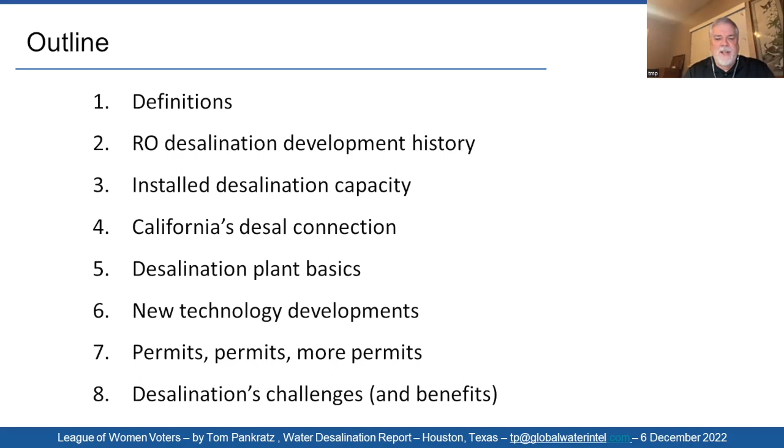Now, desalination - let's go to the next slide. Desalination means different things to different people, but basically it's the removal of dissolved solids, primarily salts, from water. It can be seawater or brackish water. In fact, for making semiconductors, they take drinking water and run it through a desalination system to remove anything remaining in it. So desalination is a pretty broad subject.

Now, I've already heard someone mention desalinization. While that's acceptable, it's kind of an archaic way of pronouncing it - primarily a European pronunciation that's pretty much fallen by the wayside. So I don't usually correct people, but if you want to sound like a true desalter, as we call ourselves, we pronounce it desalination.

The salts or dissolved solids in water are usually measured in milligrams per liter or parts per million, ppm. They're basically interchangeable - there are some subtle differences, but it's the amount of salt in water by weight. To put things in perspective, drinking water that's palatable, as provided by most municipalities, usually has less than 500 parts per million of salt.

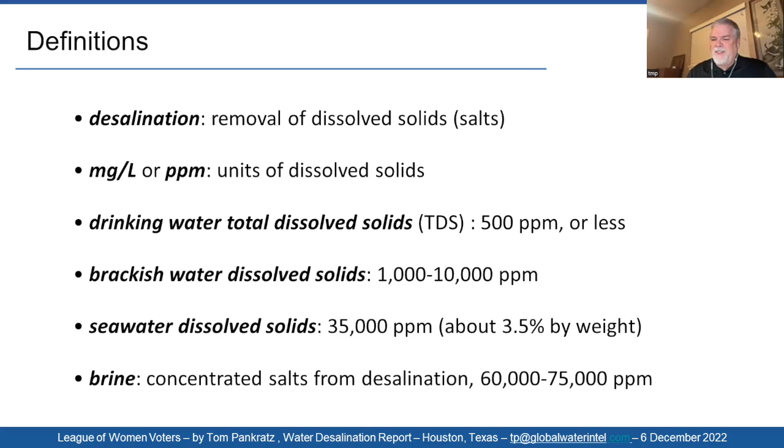goes through the reverse osmosis system we'll be talking about, just like seawater. But today's presentation is going to primarily focus on seawater, which has a dissolved solids concentration of 35,000 parts per million - that's about 3.5% by weight. When you're desalting water, you divide it into two streams: one essentially fresh water with a TDS of less than 500 parts per million, and the other with concentrated salts, including the salts that were in the water initially and the salts removed from the drinking water. So you're almost doubling the concentration of salt in the water. Next slide.

Now, the whole discussion today is going to focus on reverse osmosis, which is a membrane process, and it's the primary way that seawater is desalted around the world. For many years, for the last 70 years, there were a lot of evaporative systems which boiled water and then condensed the vapor and used that as drinking water. But the cost and the energy required has gotten prohibitive, so most of the world's desalination capacity has shifted to the membrane process.

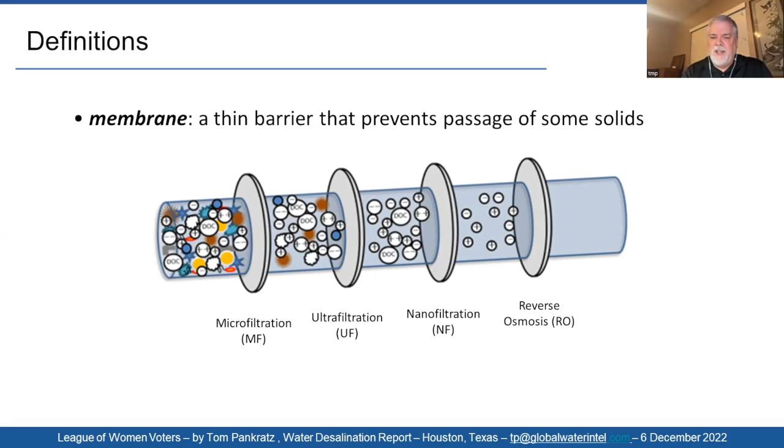It removes some of the bad actors, and if you've got a fairly low salinity in the groundwater, or maybe just some organics that you want to remove, it may be a less expensive alternative. Now, ultrafiltration and microfiltration are two filtration processes that remove bacteria, sand, silt, and other solids in the water. So with reverse osmosis, if you're trying to get out the individual salt molecules, and it has all of this other stuff in the water, sand, silt, algae, bacteria, pathogens and so on, it could really plug up the RO membrane. So it's important that you get those out first. You wouldn't have these four membranes in series, but you might have either a microfiltration or ultrafiltration preceding a nanofiltration or an RO membrane.

So it'll continue to do that until it reaches... can you go back a slide? Yeah, right, sorry about that. Okay, go back one more too here. Yeah, sorry, okay, that's okay.

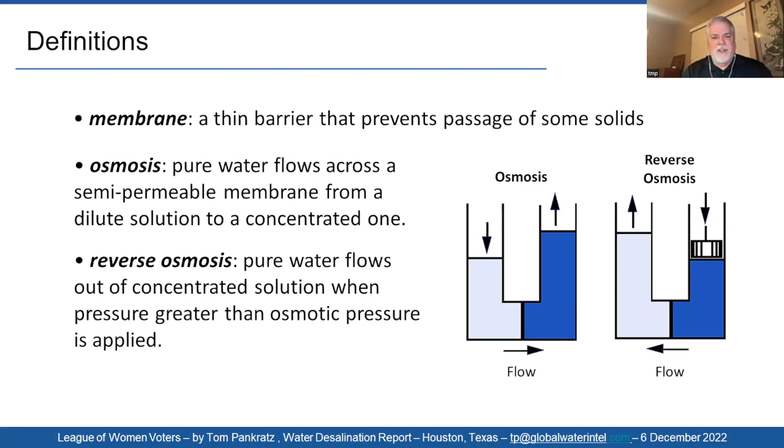Okay, so a little bit about the membrane itself. It was developed at UCLA, although the process of osmosis was understood and invented back 200 years ago. There was never a practical way of applying it to desalt water until 1959, when two university researchers at UCLA developed the cellulose acetate membrane, and they patented it in 1960.

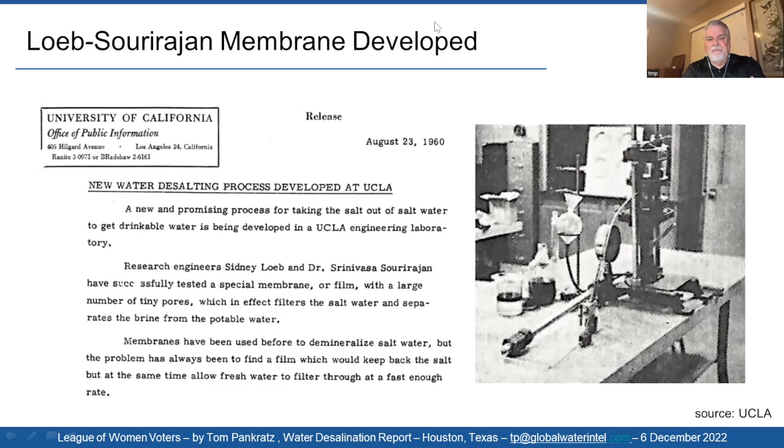In fact, just in the last year, Coalinga is now reconsidering. It's grown quite a bit naturally, and with the drought affecting the Colorado River and other water supplies, they're considering going back to RO.

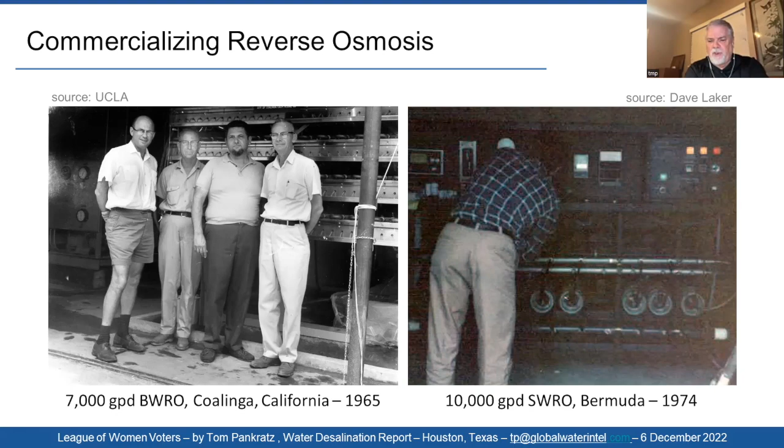The slide on the right shows the first seawater RO unit that was installed in Bermuda in 1974.

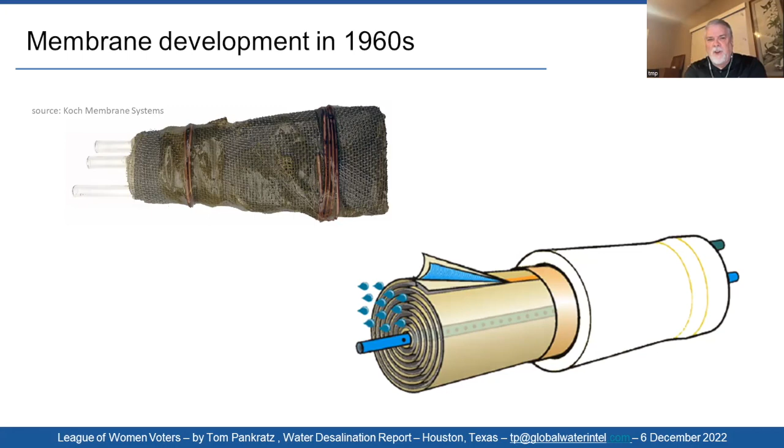This shows the modern one. The company that made that upper one was Roga, as I said, and they were bought by Fluid Systems and then Koch Membranes. This first membrane was in a little glass case right outside David Koch's office.

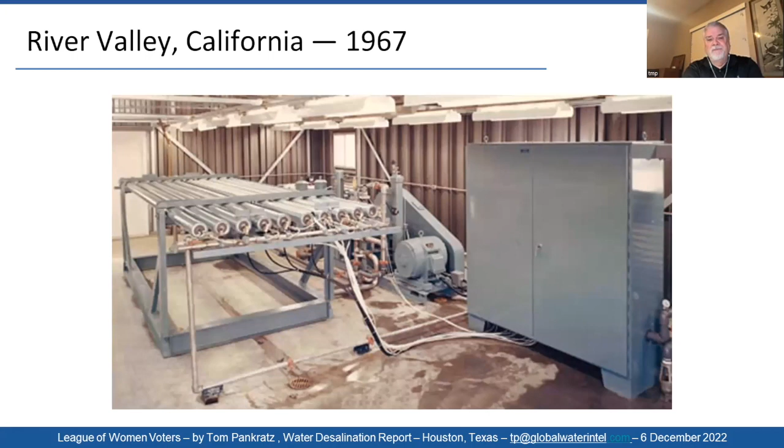So just a little bit of history, but we see here that if we look at 1967, when that was the biggest in the world, we've come a long way. About 2000, the industry really started to take off because reverse osmosis was proving more effective. We got a lot of experience here in the 80s and 90s, but still there were a lot of evaporators going in, primarily in the Middle East. But around 2000, it really started to take off.

And since then, almost all of the capacity that's been installed around the world has been in seawater RO. I've got the units up there to give you an idea: 26 billion gallons per day of water is desalted. Now that's desalted both seawater and brackish water, but it's the cumulative capacity that's been installed since 1965.

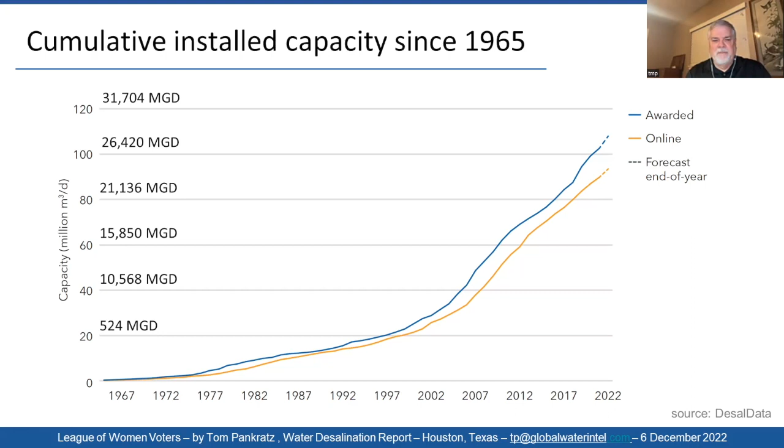Just a quick look at recently, in the past few years, we've installed more new capacity, with 2019 being the record. We've passed that up, or are about to pass it up next year, with getting 7 million cubic meters a day globally. So it's growing quite rapidly.

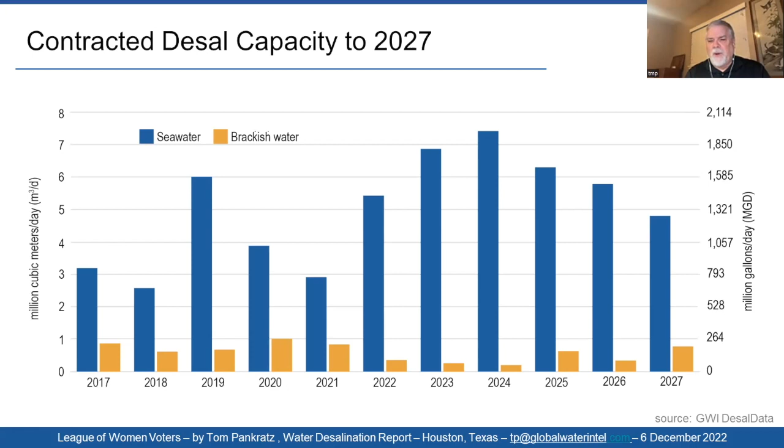But one of the big issues in California has been the intake. How do you remove the water without sucking in marine life and killing it? The Coastal Commission, who is the governing body in California, is extremely active in protecting the California coast. And the California Ocean Plan has a very rigorous intake requirement, and it's prevented most of the recently proposed plants from moving forward and slowed down quite a few of them.

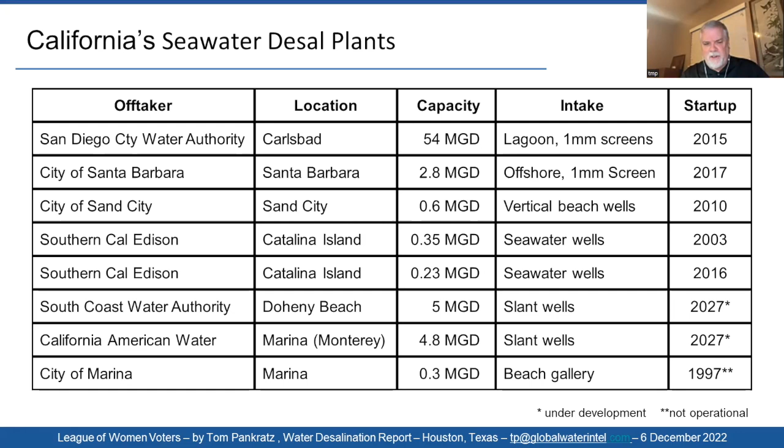But this gives you, these are the plants right now, the only seawater plants in California. There have been quite a few more proposed. There are some other ones that are in the very early stages, but I wanted to start by just providing that baseline. Okay, next slide.

And the California connection—one of the reasons I spend a lot of time in California is because a lot of the companies and consulting engineers that I do advisory work for, and have been involved in a number of projects—one in West Basin, one in Santa Cruz, one in Marin, as they were trying to develop it. So I've been out for those projects and others.

But there are a number of desal companies that are headquartered in California. And that's really where, first of all, we know that's where it lists the desal innovations at the top. That's where the membrane was invented. The spiral wound element was developed, along with a number of other firsts.

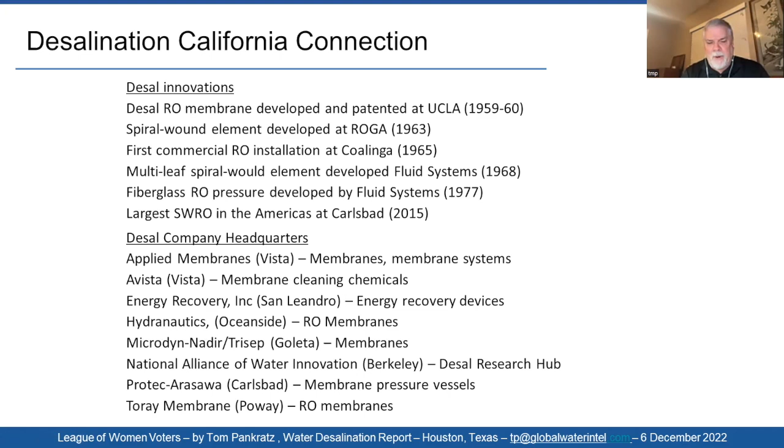And then some of these companies are world-class companies. In fact, this Energy Recovery Incorporated—they probably have 80% or more of the seawater desal market with the device that they invented to recover energy from the system and reuse it. Some of the biggest, two of the four biggest membrane companies are headquartered in California.

Next slide. So I'm going to start here and just kind of walk you through a desal plant, show you the basics. This first slide is the most basic diagram that I could come up with, showing the elements of a desal plant. And we see, first of all, the seawater intake, which is a screening mechanism. We'll look at some of those in a little while.

Then the water has to be pre-treated. This is where you get out the solids, the sand and the silt and so on, so that the membrane can do its job. Then once you go through the pre-treatment system, you pump it up to something in excess of the osmotic pressure of the water. In the case of a brackish water system, you might pump it to 200 to 400 PSI. In the case of a seawater RO system, it would be 800 to 1000 PSI.

The water that goes through the membrane is considered desalted. Then a little bit of some minerals are added back, some calcium and others, just so it tastes better. And then it becomes product water. Meanwhile, the concentrate—which is all the brine, remember the 60,000 to 75,000 milligram per liter salt—is discharged back to the sea.

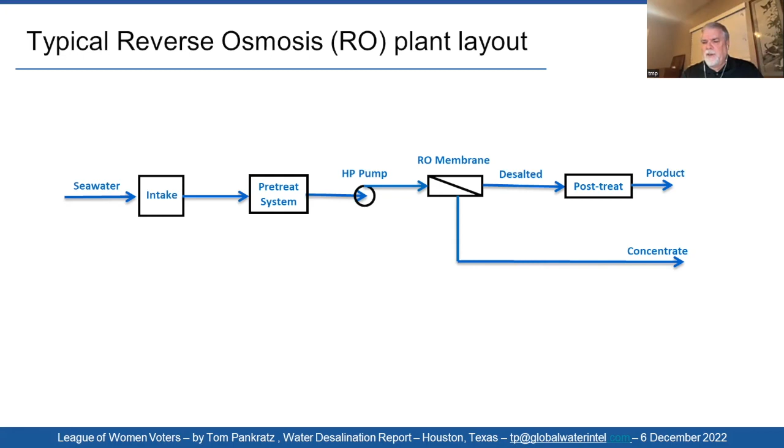Now, the next slide shows the typical variation that you have for a seawater RO plant. As I just said, for a brackish water plant, you're only operating at 200, at the most 400, but probably 200 to 300 PSI. For a seawater plant, though, if you're operating at 800 PSI, once you pump it through the membrane, the desalted water comes out at just 10 or 20 PSI, pretty low pressure.

And all that pressure is stored in the concentrate. So what they've done to make seawater RO more energy efficient is they take that high pressure, run it through essentially a little turbine, and use that energy to boost the high pressure pump, so they're able to recover well over 50% of the energy. This is a way that we keep the energy cost down to a much more viable range. The concentrate is then discharged.

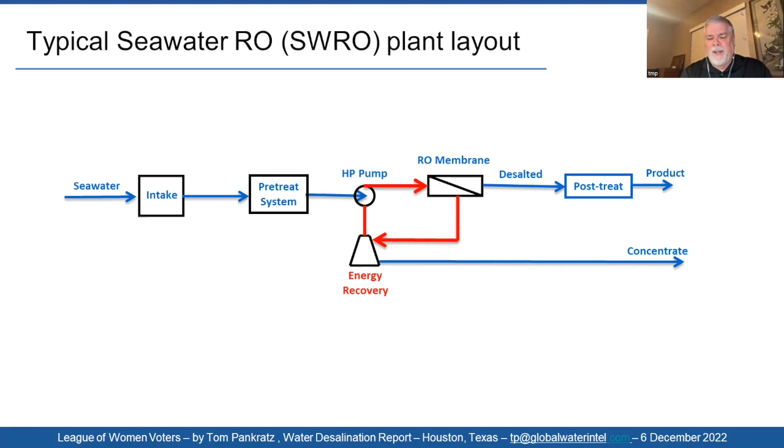So this is what the elements in this particular schematic are, what you'd see in a seawater RO plant. Now, the next slide shows another change that's also made for most seawater plants. In fact, the ones in Carlsbad and Santa Barbara certainly have this.

They take the solids out in the pre-treatment system. You might remember from that first slide where I showed all that stuff removed by the ultrafiltration or microfiltration membranes. Well, you've got to get rid of that, and that goes to another residuals treatment system and then is trucked away as sludge. Meanwhile, the water that's recovered from that goes back into the system. So it's all an attempt to keep this thing from wasting any water.

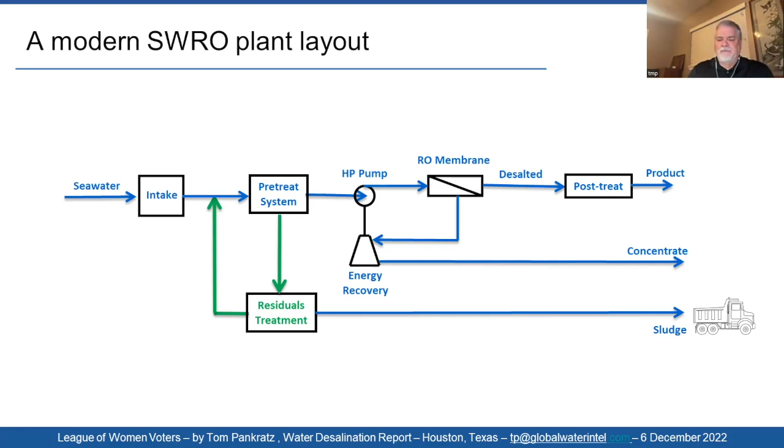And once you've treated it and pumped it from the sea, you want to turn as much of that into drinking water as possible. Next slide. To show you the water balance here, this is what you can expect out of a seawater RO plant. For every 100 gallons you put in, you expect to get about 45 gallons of product water and 55 gallons of brine. The sludge is just solid, so it really doesn't factor into that equation.

This is what we call the recovery. So the system - some people say an RO plant is inefficient, it only recovers half of the water. Well, that's true, but the fact is that once you start concentrating that brine up as high as you do, over 60 or 75,000 milligrams per liter, it gets very expensive to recover any additional water. So that's a concession that has to be made, and we'll talk more about that later.

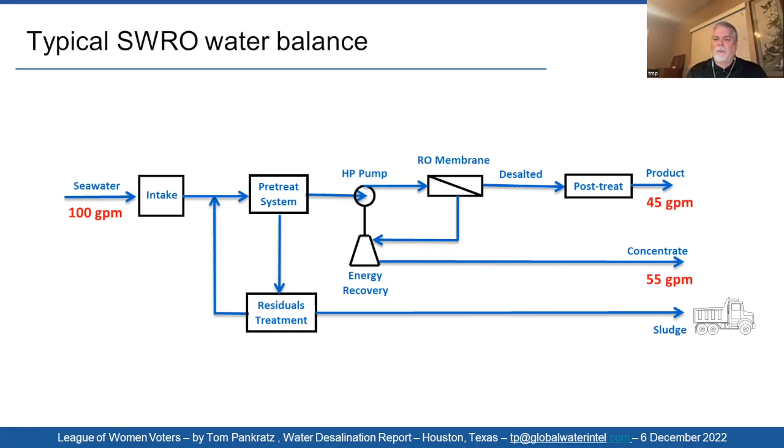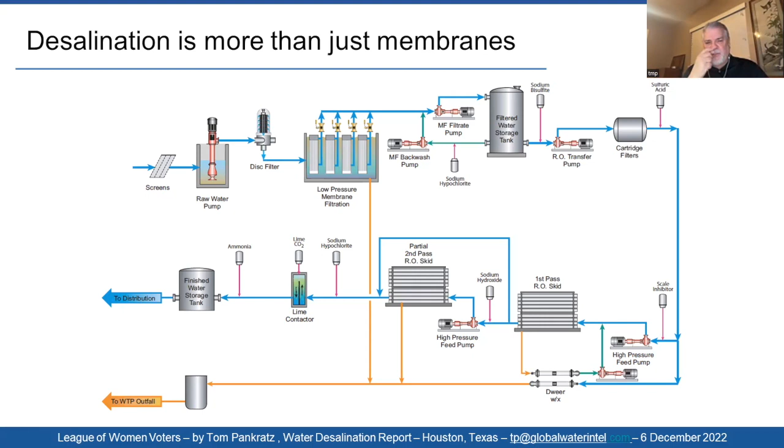Next slide. I've shown you just a block diagram in the previous slides. This shows what an actual functioning plant would look like. Starting in the upper left, the water flows from left to right, then down, and then through the system. So we're going to quickly break this down into its component parts.

Next slide, and the first being the intake. This shows what a typical seawater intake looks like in most of the world. You have these intake heads, which have screens on them, ranging from 1 millimeter in some plants, especially the California plants, to as much as 2 inches in some other plants.

The water is then pumped to shore where it's treated in the desal plant we see on the shore. The drinking water goes out one end and the concentrate goes back out to the sea and is discharged through some diffusers. We'll talk about those in a little more detail later.

But this just shows you what I'd say is 80, 85 percent of the plants around the world, how they're configured. You try to get the intake out in an area that is not very biologically active, or less biologically active than what you find right near shore.

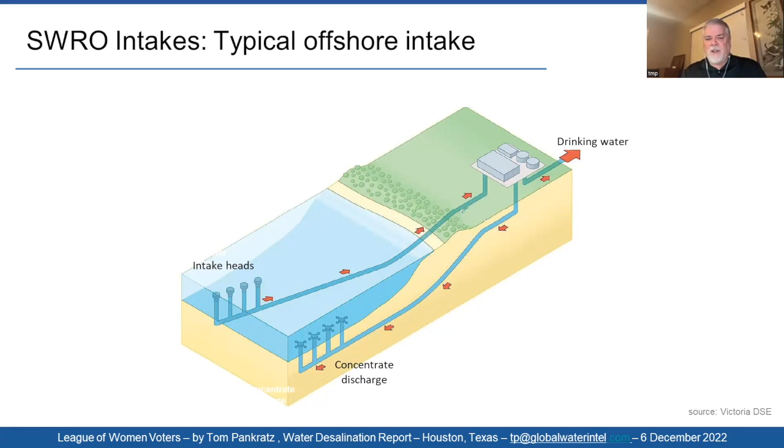In some cases it's 200 or 300 meters out; in some cases it's a mile and a half or more - well, a mile and a half at the most, probably. But you go out a long way because, as I said, you want to get out into an area that's less biologically active, and you're less likely to catch the juvenile organisms or fish that spawn near shore.

Okay, next slide. The gold standard project is in Fukuoka, Japan - a fairly large plant, but it's in a fairly enclosed bay. What they did is excavate a big area, a couple of football fields in the sea, then laid pipes down and covered them with sand, and let the water cover the whole thing. So the water has to percolate through the sand into the pipes, and then it goes on shore.

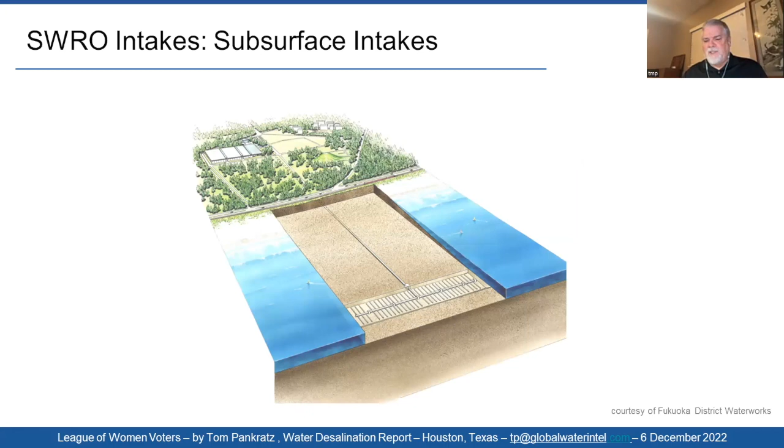Now that's a great way to do it because you're not interfacing with the fish or marine life at all. Next slide. But it's pretty impractical in most places - it's always looked at in plants, but there's only one large plant, the one you saw right there, that has done it successfully.

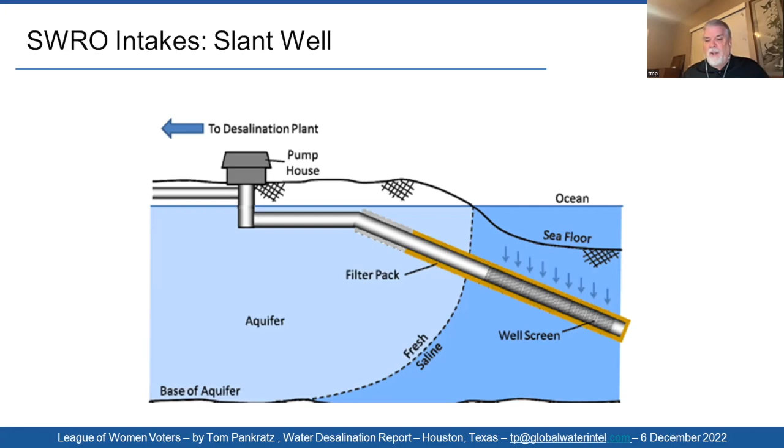What's being used in a couple of plants in California is what's called a slant well. It's kind of a variation of that, where you hydraulically drill a slant well out from onshore, under the seabed. The water percolates through the seafloor into the well, and again you're preventing it from catching any fish. The disadvantage of this arrangement is that you're not able to build a large plant, because these wells just don't work quite as nicely as you'd like them to. Next slide.

This is a more common intake. This is what a lot of the plants have on them on the offshore intakes, and some of the nearshore intakes, with a wedge wire screen.

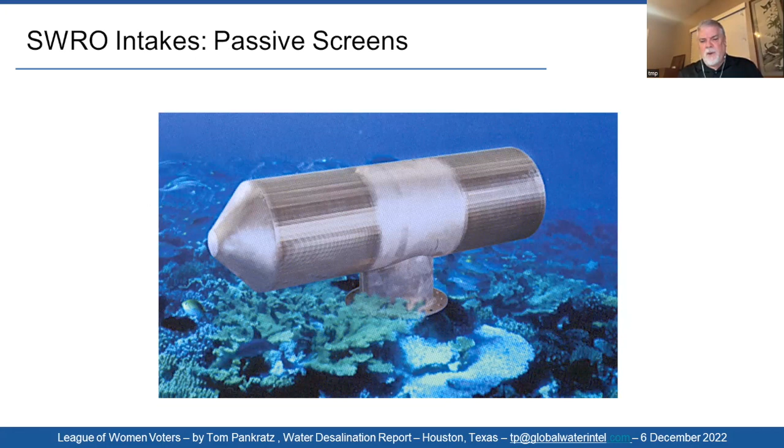Next slide. The next part of the project is the plant's pretreatment system.

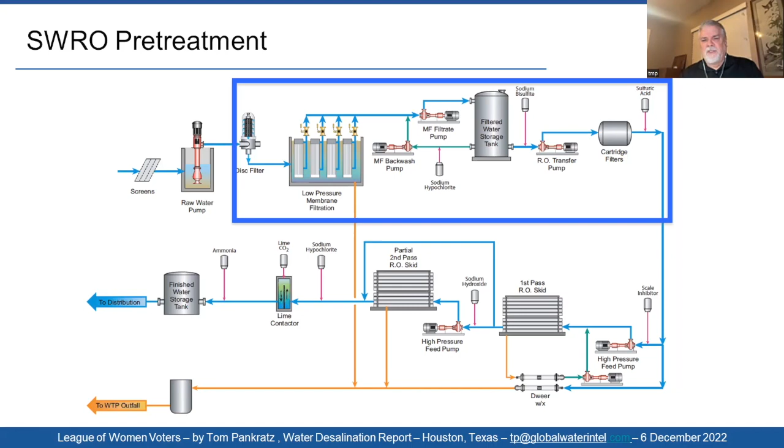In some cases, it uses membranes like ultrafiltration membranes. This is a plant in Sydney, Australia, which uses the same ultrafiltration membranes that I showed in one of the first slides, the definition slide.

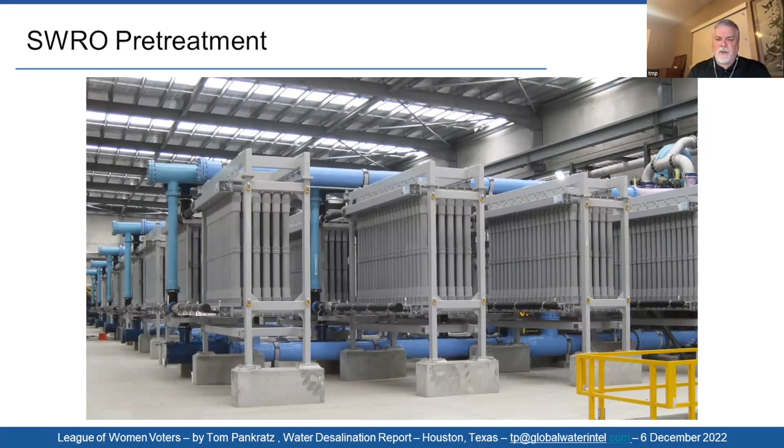Then it goes on to the pumps and the piping. This is where you pressurize the water and pump it up to 1,000 psi.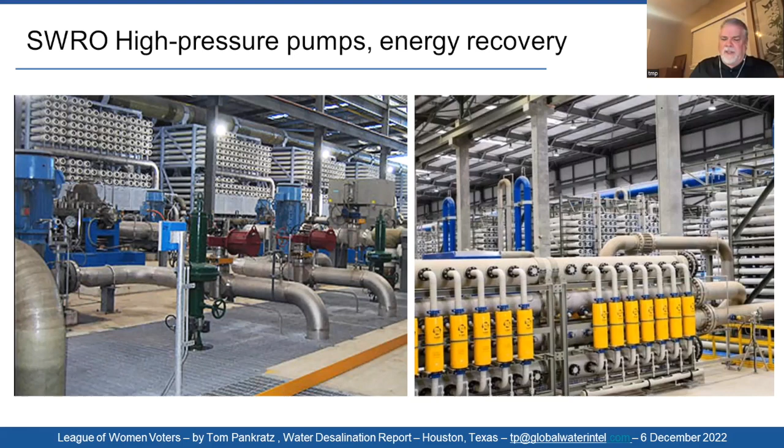This shows some other various plants. They're all constructed differently depending upon the availability of space. This one on the right is Sand City, a little place up in Northern California. It has a very small plant, but pretty confined.

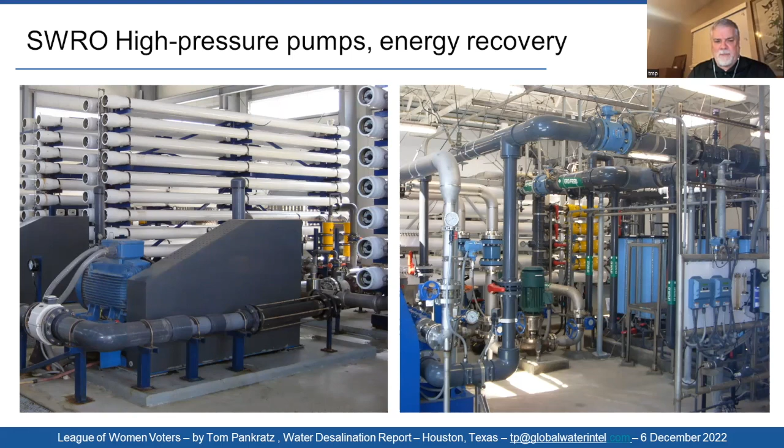The one on the left I took on a project in Saudi Arabia, and you see it's a lot more open. But again, you see the pump - this gray box and this blue thing are the pump and the energy recovery devices in the back.

Then we go to the RO membranes.

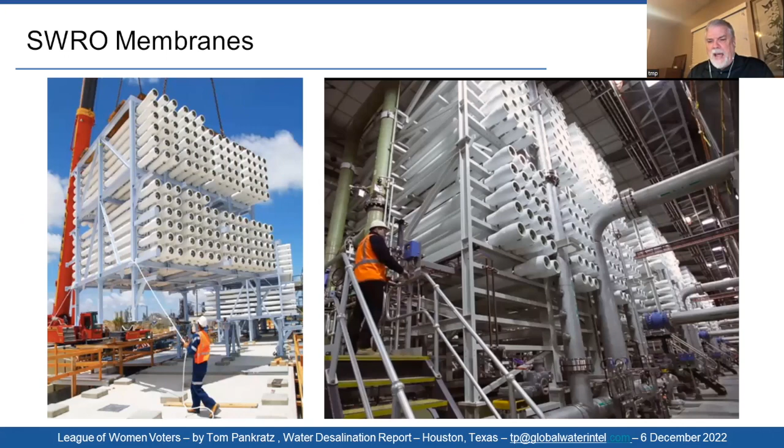We just see a couple of configurations. The one on the left is in Perth, Australia. These racks are so big they often construct the buildings around the racks. The one on the right is in Melbourne, Australia.

And then the concentrate, the brine - that's once you take the finished water and post-treat it, and it goes to use. Then we go to the outfall.

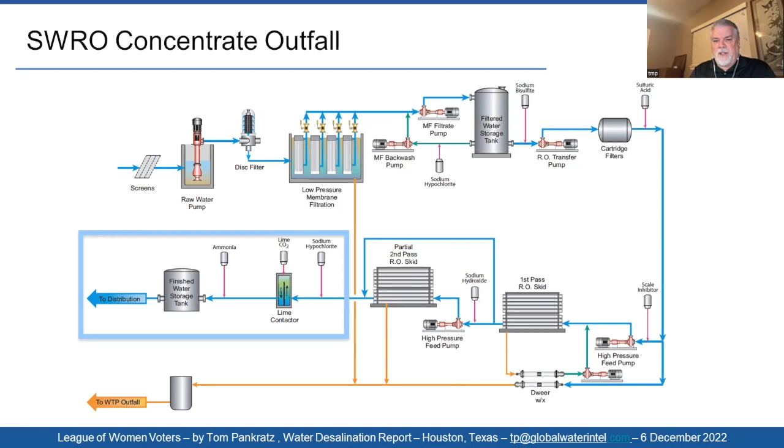This shows what you do with the brine. This is one of the other big areas - the intake and the outfall are the two big issues. What you do with the outfall is take the brine, and the goal is to mix that water as quickly as possible with the seawater, because some fish, marine life species, and certain types of seagrasses are intolerant of salinity changes.

So to minimize the salinity change and keep it as close to ambient as possible, we discharge the brine through a nozzle, and it's jetted up and out. This allows it to mix with the seawater, and because it has a lot of salt in it, it's denser and it'll settle to the bottom. So you want to push it out and up so that by the time it gets to the bottom, it's all been assimilated or dissolved in the ambient seawater.

The goal of most designs is that within 100 meters of discharge, it's assimilated into the seawater, so there's a minimum difference in salinity - you're not increasing the salinity by more than 2% within 100 meters.

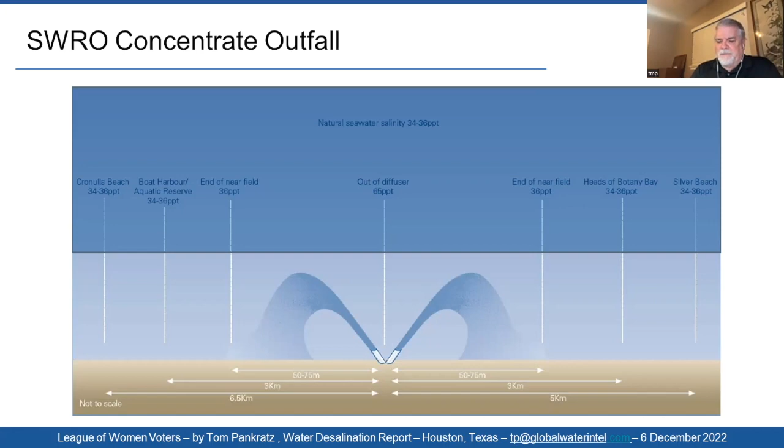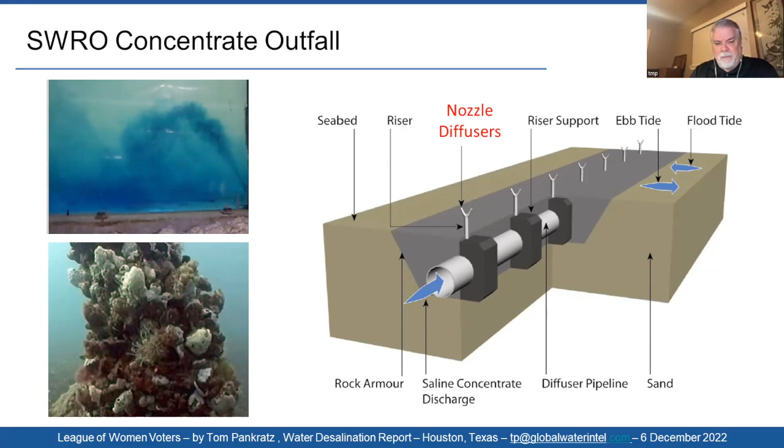This shows these nozzle diffusers in red. They usually put the pipe underneath the seabed, and then you see the nozzle diffuser. On the upper left is a study they did using a dye to see what kind of dispersion they get with the nozzle. On the bottom, it shows one of the nozzles that was in service for 1.5 years - it shows all the barnacles and the growth on it.

So there we go - just wanted to point out that a seawater RO plant is a pretty complex project. If you look at the pretreatment system, that's analogous to a conventional water treatment plant, and here we've got all the rest of the kit built around it. It's operating with very corrosive waters, high pressures. Safety is a big issue, with a lot of expensive materials, and that's part of the reason it's as expensive as it is.

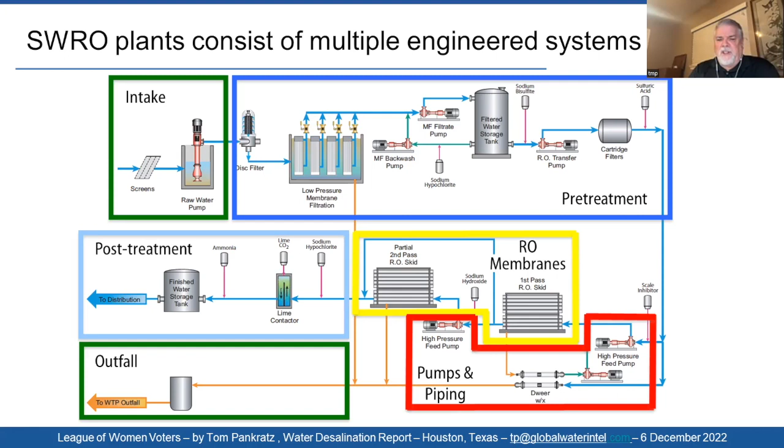There are a lot of new developments, and they're pretty esoteric. Rather than go through them all, I wanted to cover some, but without this cursory introduction, it would have not made a lot of sense.

A lot of the stuff we see in the regular world, the changes in the digital desal - there's a lot of artificial intelligence, or AI, being used, new sensors. There's a lot more monitoring going on so that changes can be made, as with temperature changes, salinity changes, energy costs as they go up or down. Changes must be made. So a lot of digital desal.

They're looking at new membranes, to make them more strong or more robust, produce more water. They're even looking at 3D printing of membranes, and there's a lot of work being done in universities.

Brine concentration - some plants are considering zero liquid discharge, which means all of the brine is desalted and you produce a brine that can be reused. The problem with this is it's very expensive, and prohibitively so in most places, and the stuff you're recovering is pretty inexpensive commodity chemicals - salt, as one glaring example. Another one is calcium sulfate, or gypsum, that you make sheetrock from. But even the salt from one big plant like Carlsbad would inundate the local market. So it just isn't very cost effective.

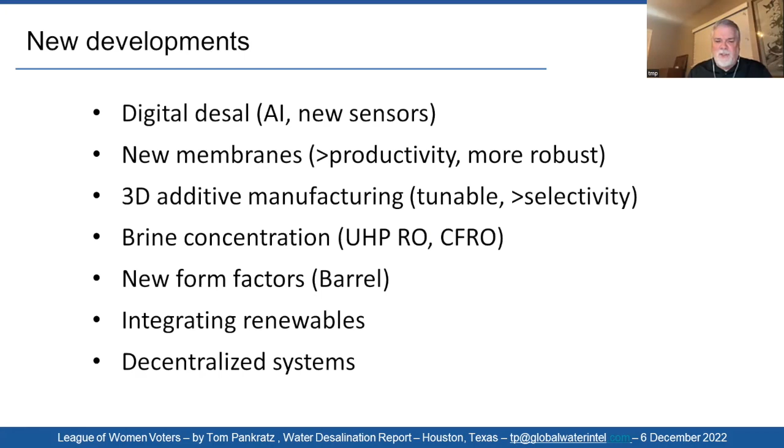Decentralized systems - these are smaller systems. Rather than building the big monstrous Carlsbads, why not build smaller systems? There's, like everything, something you have to evaluate, because in some cases it makes sense, in some it doesn't. There's no one simple answer here.

One of the big problems in California is the permits. There's these two pages of permits I've got here that have over 27 agencies that provide over 40 permits, or up to about 40 permits. This shows something I got from the Doheny project that's being done right now, and in fact it's going before the State Lands Commission on Friday. This shows some of the permits.

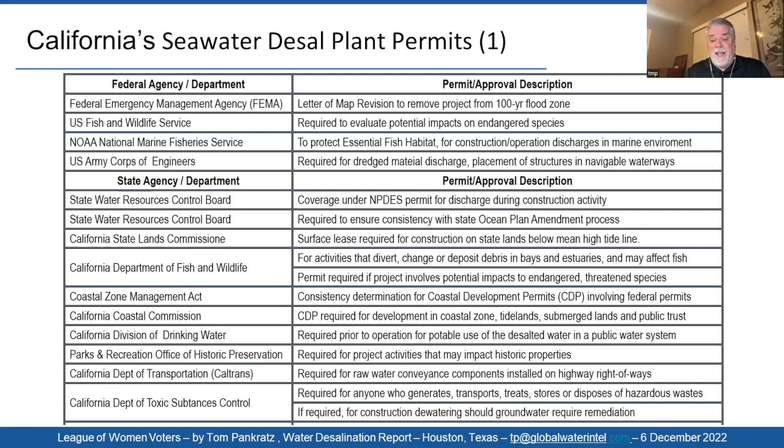This is a big issue. In fact, this has been one of the most contentious issues of the last couple of plants - the environmental justice issue, the fact that desal plants are being constructed in areas where there are a lot of impoverished people. There's certainly a push to make sure that it's not being done unfairly.

Most of the plants that have been proposed in California have been proposed where there's an existing power plant, so they can share the intake and outfall. I know for a fact that was the state of the art back in 2000, 2002. It wasn't until about 2003 that the state started saying, wait a minute, if we put in a desal plant, it's got to be a standalone facility. But until then, almost the only place to put a desal plant that made sense was near some other industrial activity, since the land was already permitted. You didn't want to put it in a subdivision or a neighborhood if you could help it. So it was put in an industrial facility.

This has led to issues, though, in California, trying to mitigate the potential impacts. We've got a project right now in Corpus Christi that is just beginning to deal with this environmental justice issue. So it's one of those tough issues, because it's not an engineering problem - a lot of work is required to satisfy all the parties.

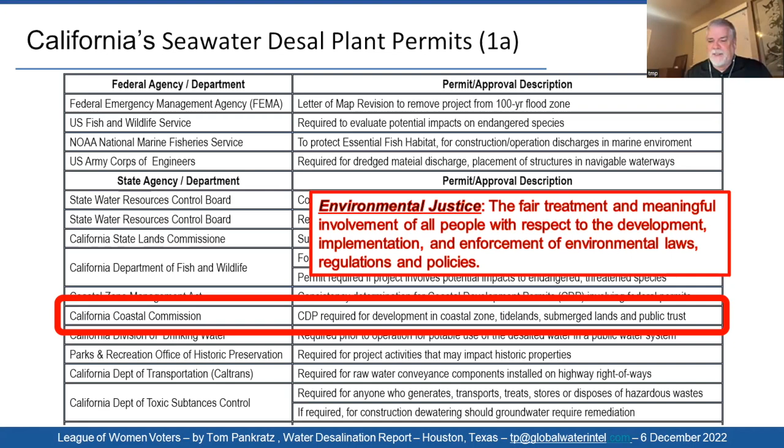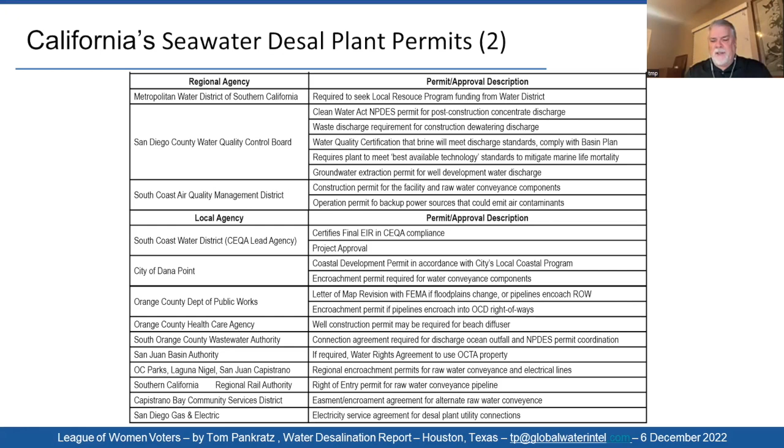The next page just shows the remainder of the permits needed for a project in California. Some of them, admittedly, are just fill out a form and you get a permit, but some of them require literally years of negotiation. The plant in Marina has been being discussed for over 20 years, and there's been numerous submittals for permits, but it's been delayed and delayed and delayed.

One thing you try to do when looking at desalination is look at the overall water portfolio. If we look at San Diego's water portfolio in 1991 or 1999, we see that most of the water came from Metropolitan Water District, a big wholesaler in the LA area, which imports most of its water from Northern California. That's not a very sustainable solution. In fact, by the time you pump the water to parts of San Diego, it takes more energy than it does for a desal plant.

But they've been making changes and diversifying their portfolio. They've looked at conservation, recycling, groundwater, all displayed at the bottom there. The Carlsbad plant represents 10% of the water in San Diego, and it's the only new local source. If they get cut off due to a tsunami or earthquake, they'd be without the water from Northern California. So that's one reason people look at desalination, to diversify the water supply portfolio, and they intend to do even more by 2045.

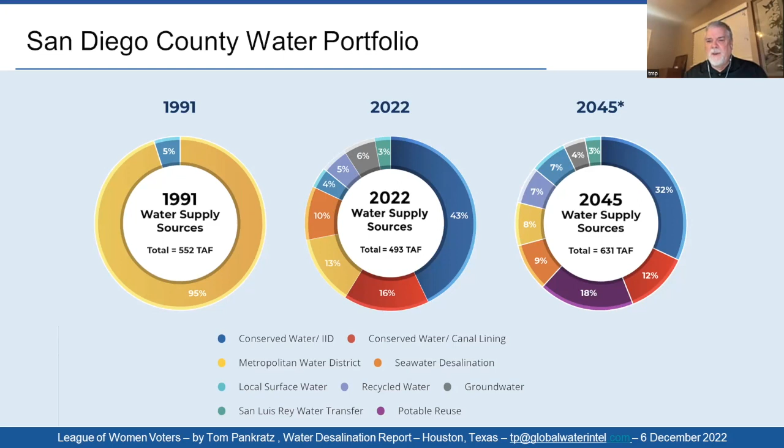When you're looking at desal, people always talk about cost, because it's clearly higher. But there was a study done in Israel. Israel built its first large-scale desal plant in 2005. It went online, and they had such hard water that you couldn't get a warranty on your washing machines, refrigerators, or ice makers, because they would corrode due to the chlorides in the water. Since 2005, by 2022 they now have about 80% of their water provided by desalination.

Even by 2010, when their third plant was operational, they already saw a reduction in chloride concentration in the groundwater, and in hardness, which they calculated increased the value of the desal plant by an amount equal to 45 to 65% of the cost of the plant. This resulted in improvements not only in water supply reliability, but they were able to grow more crops per acre, reduce aquifer withdrawals, and increase the amount of water they could reuse. It also reduced hardness, allowing them to get back warranties the rest of us take for granted. They project, and are still studying, that it will have significant further reduction.

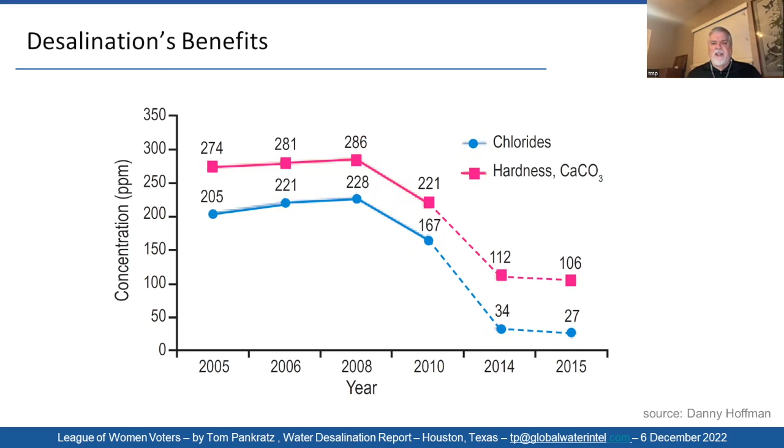Desal's challenges. This is probably what everybody is most interested in. The first challenge is planning: when do we build it? There are countless cases of people building a desal plant, and within the same year it starts to rain, or in some cases they have floods, and people call it a white elephant.

Also, where do you build it? The water doesn't always rain and fall where you want it to. And how big should it be—10% of supply, or in the case of Israel, can we justify 90%? Siting is a big issue, and with environmental justice, we're seeing new groups adding their voice in opposition to where plants are located. When locating a seawater plant, you need to be close to the sea, and you've got to pump a lot of water inland—twice as much as what will actually end up as drinking water. So you want it close to the sea. Most plants are within a kilometer, or a half mile to a mile, of the coast, and that's where most people want to live too. So you've got opposing issues to reconcile.

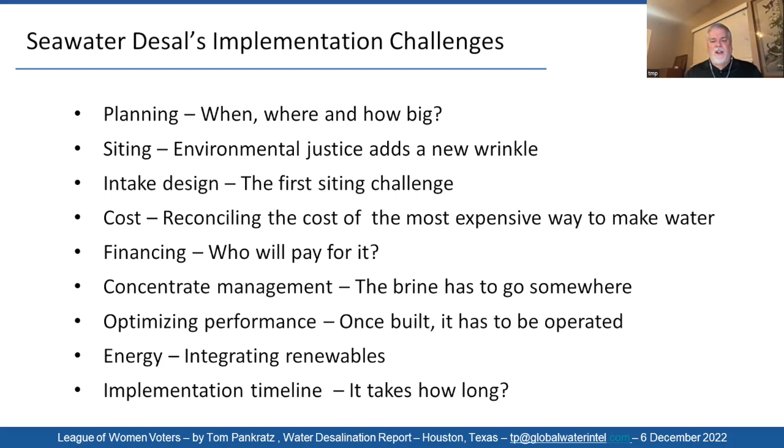There's a lot of economies of scale to desal. That's why a lot of these plants tend to be big. I've got pictures of the California plants, but I had those in there in case I finished early, and obviously I didn't. So we'll forego those pictures, and you can look at those at your convenience.

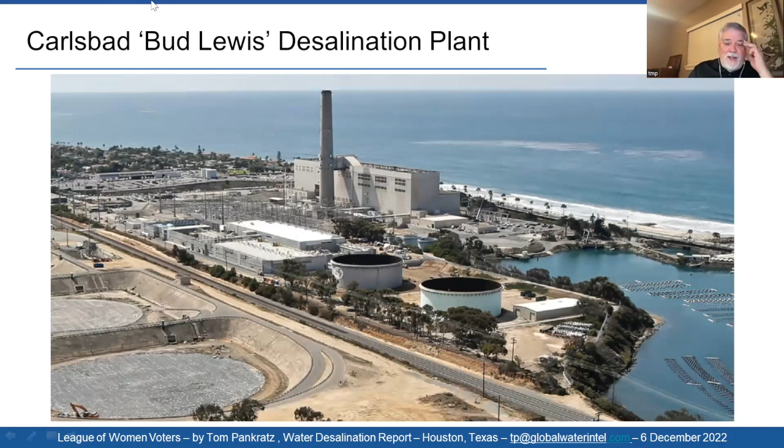Okay, the first question is: how much energy can you save with 2-stage RO? Well, a 2-stage RO actually costs a little bit more in terms... now, a 2-stage RO can save some energy, but in some cases you need a second stage anyway. And that's kind of a complicated answer.

I'm not able to answer that really effectively without looking at a diagram. But as far as energy savings, desal plants, in my opinion, we've gone about as low as we can go in energy. Some plants need 2 stages, some plants need sometimes what they call 2 passes - it goes through the RO membrane twice rather than in a stage. A lot of it has to do with how you design your plant. There are trade-offs with almost everything you do, and certainly how you configure it in terms of stages. So it's not an easy question to answer.

So the reason you would do a 2-stage typically is to just get higher recovery, right? But it's going to take more energy. So I don't know if that's what the person understood the reason to be - that's the reason you would do it, to get higher recovery. 2 passes is usually to get better water quality, if you've got real high salinity. Well, both of them take more energy.